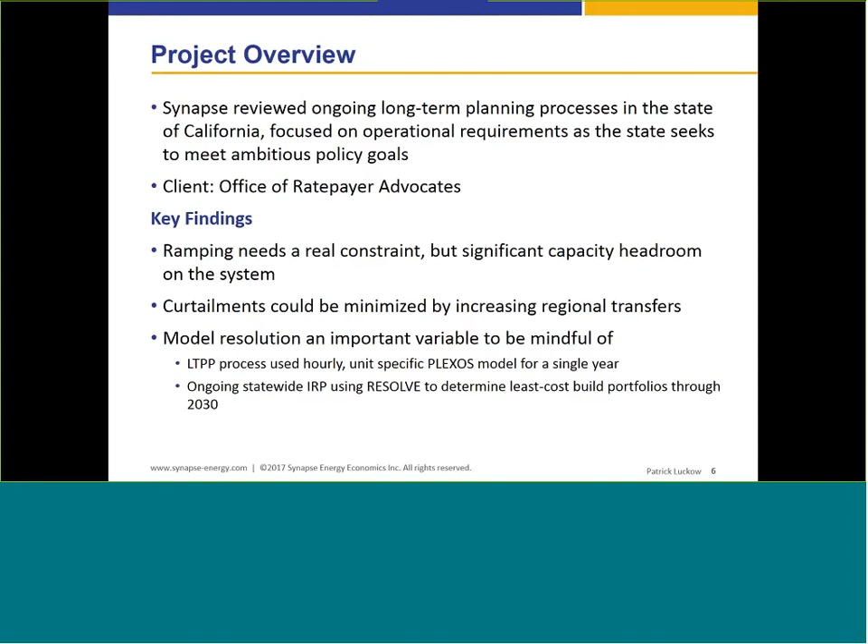Our client for a lot of this work has been the Office of Ratepayer Advocates in California. I've got some key findings on this slide, but I'll cover these as we go. The major factors that we addressed were largely operational requirements as well as ultimate capacity requirements, and I'm going to focus on some of the key characteristics of the different models we've used.

So just to set the scene a little bit, one of the things you'll see mentioned a lot in the context of the California electricity system is the impact that significant new renewable energy builds are having on the grid. And one of those major impacts is seen in the shape of the net load curve.

And that presents some challenges to the system. You have to be able to turn down conventional power plants as solar ramps up in the morning, and then rapidly turn on new resources at the end of the day as the sun goes down. Fortunately, it's a somewhat predictable cycle, so that helps, but there's still challenges with this big ramp up in generation.

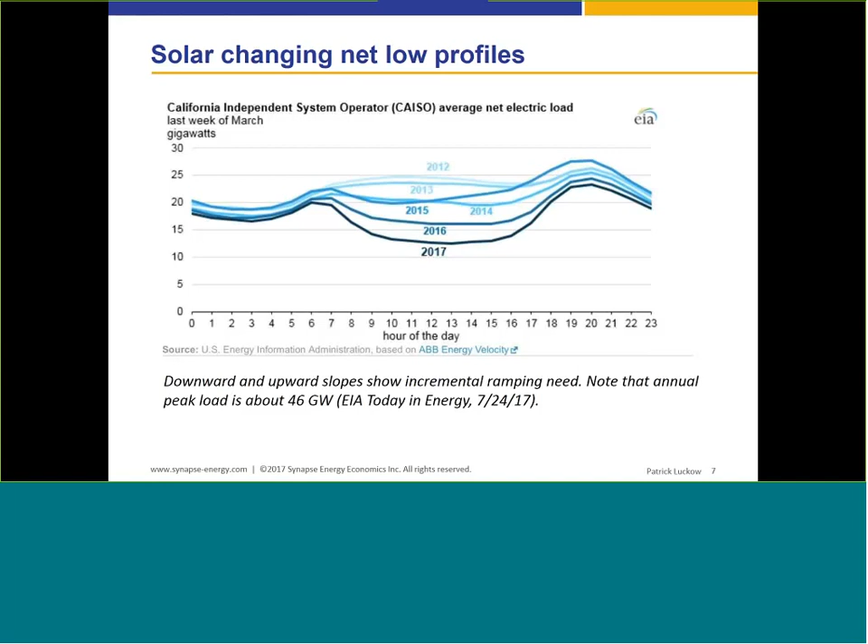And this is a day where California was able to balance these fluctuations and meet the system needs without major reliability considerations. So next I'll move on to some of the modeling challenges we've talked about.

So a lot of the modeling we've done in California has historically been with the Plexos tool developed by Energy Exemplar. This is a very detailed model with all the power plants in California. We model all 8760 hours of the year. The model we used in this context actually had all of the power plants for the entire WECC, all of the states in the West. So it was a very detailed model that had some challenges associated with it. Model runs took a long time. I think a typical run for a single month in 2024 for this project took on the order of 8 hours. So that was a significant constraint.

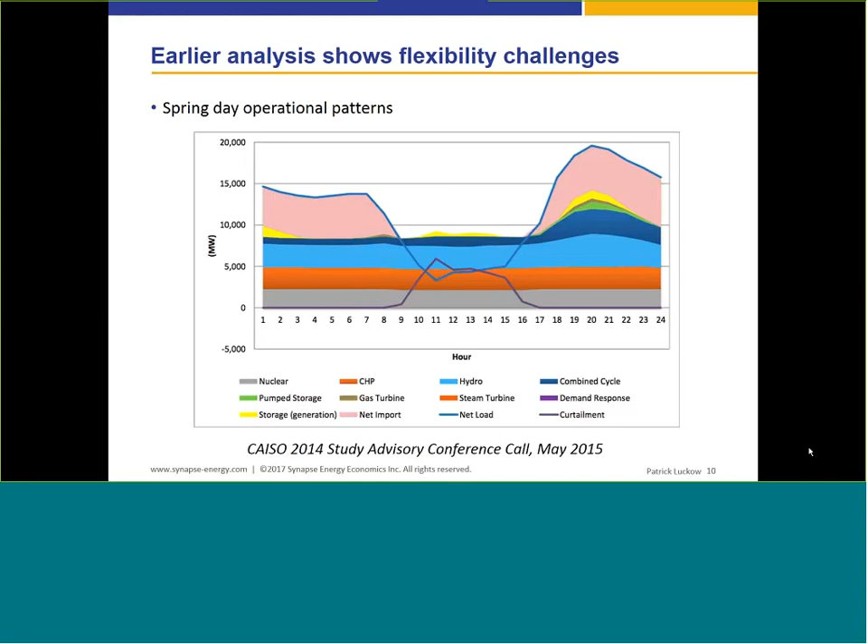There are a number of incremental steps that can be taken to improve this behavior and reduce this level of curtailment that you're seeing on those days. I have a list of those on the next slide that I'll just walk through quickly. And I would say California, in their planning processes, are addressing all of these items, which range from time of use rate making, using different rates for customers at different times of the day to discourage demand at the highest peak hours and encourage demand when electricity is really cheap. Maybe those middle of the day hours where there's a lot of solar energy on the system. Targeted energy efficiency towards those periods where demand is the highest.

Storage is obviously a very valuable resource, whether that's the existing hydro pump storage resource or new batteries, which have come online rapidly over the last year. Electrification is a great source for dealing with this that was considered in a very limited fashion in this earlier study we did. Electric vehicles, particularly with charging at different hours that you could control or influence through the use of something like time of use rates.

Curtailment is something I wanted to mention. A little curtailment of renewable energy resources isn't necessarily the end of the world. There might only be a few days of the year where you have significant constraints along these lines, and being able to curtail some of those resources on those days might provide a lower cost overall solution. And then things like increasing thermal flexibility, whether that's through retirements of nuclear plants or through new gas plants that are much more flexible than the plants that were installed 20 years ago.

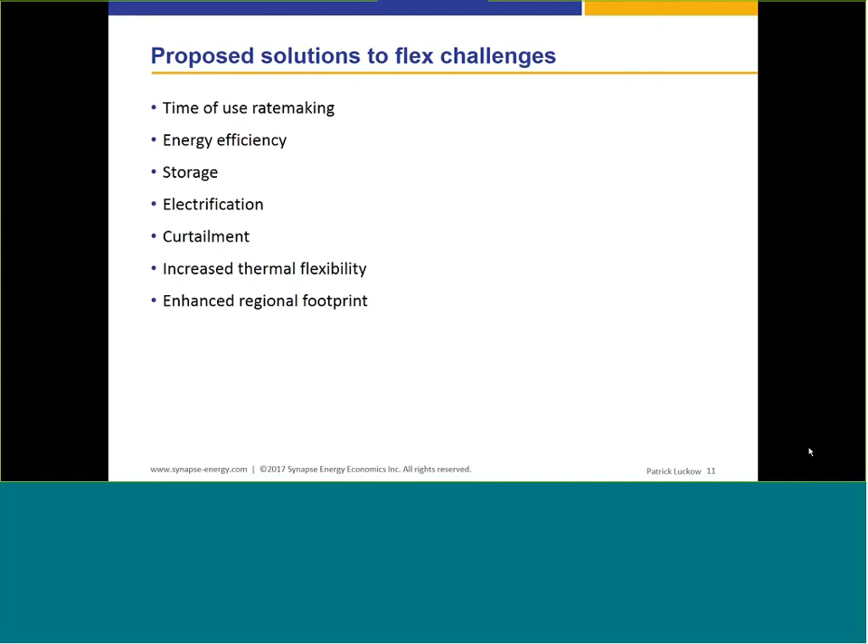So my last slide, I just wanted to touch on the latest California planning process. With the advent of SB 350, which was the bill that increased the RPS in California from 33% to 50% in 2030, there was also a mandate for an integrated resource plan. And that's just in the early steps, but I wanted to pull out some of the results of that. This is a statewide resource planning process where a model is used to consider what new power plants are added and what's retired over the next 15 or so years in order to meet these policies at the lowest cost.

This is a longer-term model than the PLEXOS model I was talking about before. This is a tool that was developed by E3 called RESOLVE, and it focuses on a few key years over the future time period, has less unit-specific resolution, but is able to consider some of these balancing challenges at the same time as considering whether it's more economic to build more solar plants, build more wind, build more gas plants, and in a much finer level of detail than other models in the same category.

And I think thinking about those two modeling frameworks is important. They're both very important and valuable in this discussion and serve different needs. So I think there's a lot of contexts where tools like PLEXOS and tools like RESOLVE can be used either in parallel or in sequence one after another to really get to some of these challenges with ambitious policy scenarios.

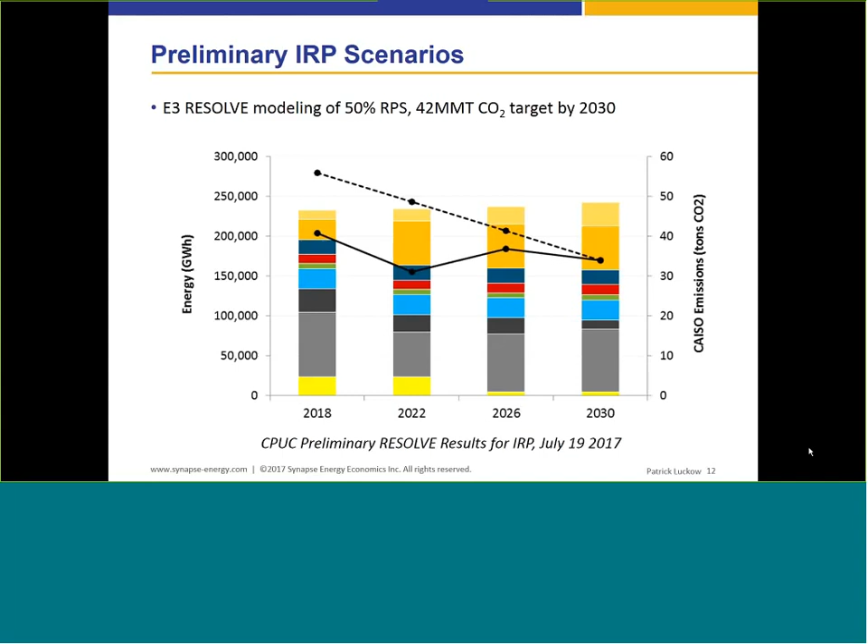Great. So let's move on to the second chunk of today's webinar about Pennsylvania. The Delaware Riverkeeper Network asked us about 100% renewable Pennsylvania. What would that look like? So can you tell us about that, please, Pat Knight? Hi, everybody. This is Pat Knight, and like Bruce said, I'm going to be spending the next couple minutes talking about a project we worked on last year for Delaware Riverkeeper Network.

In this project, Synapse partnered with EQ Research to look at a set of policies that would result in a zero CO2 emissions future for Pennsylvania consumers by 2050. And when we say zero CO2 emissions in this context, we're not talking about just the electric sector, but we're also talking about the other sectors, transportation, buildings, and the industrial sectors as well.

Just to give a broad overview of this project, within the context of the project, we looked at different plans for widespread electrification. We examined increased investment in renewables, and we also looked at strategies that could be used to improve the level of energy efficiency above and beyond what's being done today, or what is likely to be done in a business as usual or reference case future. Another goal of this project was not only to develop a clean energy future for Pennsylvania, but also to create a paradigm or a model that could be applied in other states around the country.

And I'll just briefly go over the findings. You can, of course, read the report if you'd like to know more about this, but we found that the 100% renewables scenario could achieve significant cost savings over the entire study period, could result in $9 billion in bill savings in a single year, and over the entire time period of 2015 through 2050, result in a net increase of nearly 500,000 jobs.

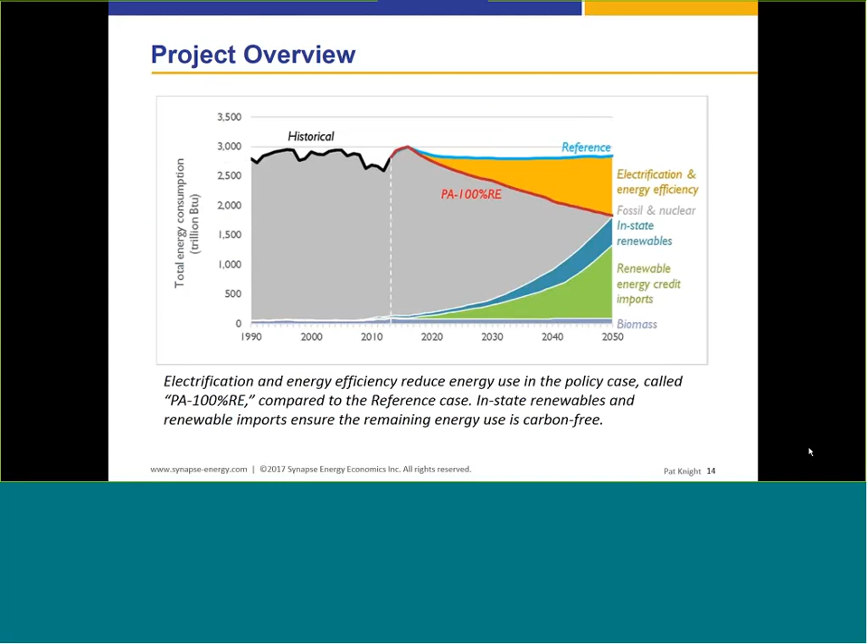So this here is a chart that shows the historical sources of energy in Pennsylvania since 1990 through about 2015, as well as the future sources of energy as they were modeled in this analysis. Again, this chart includes energy from all sectors, so not just the electric sector, but also transportation and buildings and industrial. Compared to that reference case up there on the blue line, in our policy case, the red line, we relied extensively on electrification, energy efficiency, and both in-state and out-of-state renewables to phase out fossil and nuclear energy through 2050. Two quick things to note.

Within the context of this project, we used modeling to build the lowest cost renewables that could be delivered to Pennsylvania. So what this meant is about 1/4 of the renewables were built in Pennsylvania itself, and the other 3/4 were built in neighboring states. So this means that you would have situations where, say, a wind plant or a solar plant was built just over the border in Ohio or West Virginia, for example, and then directly transmitted it into the region.

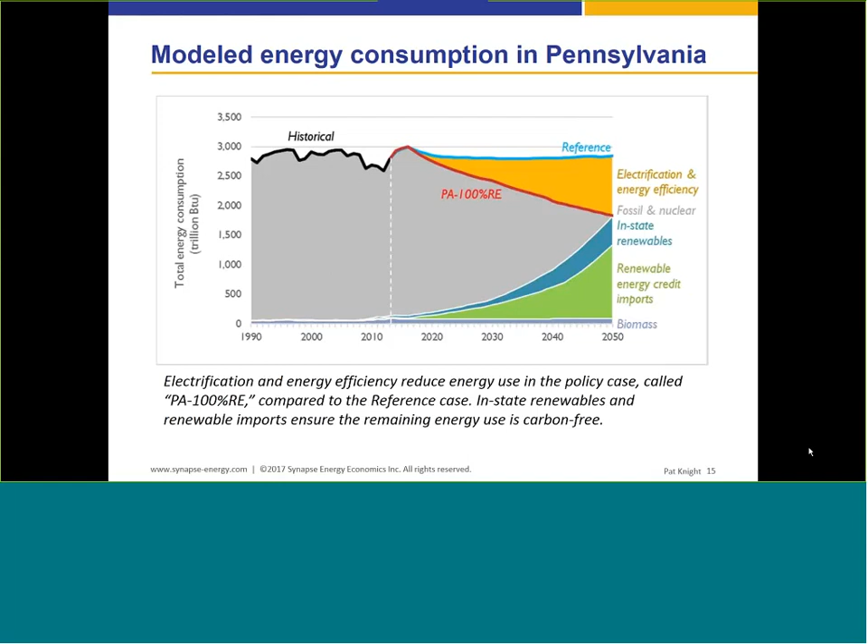The other point I want to draw attention to here is the yellow slice at the top of the chart. And that's not just energy efficiency as we traditionally think about it, but also the energy efficiency inherent in electrification. As I'm sure many people on the phone know, the current uses of energy, both for generating power from natural gas or coal plants, or from generating power in your car from gasoline, waste a tremendous amount of energy on heat. And one of the most interesting findings from this analysis was just how much energy could be saved by transferring those end uses over to the electric sector.

So you're probably wondering how we were able to get to all these conclusions. And what we've done here is make up a table showing the flow of the modeling tools used in this project. Like much of the work that goes on at Synapse, this project required the interaction of a lot of different types of modeling software. So just to talk about each one individually for a moment,

at the beginning of our project, like we do for many projects, we developed a high-level view of the problem or the issue at hand using a simple spreadsheet model. And this model is also used to help us track things like known new unit additions and known retirements, things like sales forecasts, inclusive of energy efficiency, thinking about other variables like natural gas prices and resource costs. And what happens in this step is a lot of this information gets translated into inputs for the next step.

And in this particular project, our next step involves using the ReEDS model. ReEDS, in case you're not familiar with it, is a capacity expansion model developed by the National Renewable Energy Lab, or NREL. And ReEDS contains a fantastic amount of information on renewable energy potentials, costs, and technology changes or curves over time. Synapse has adapted the out-of-the-box version of ReEDS to allow us to have finer control over certain variables like state-specific energy efficiency.

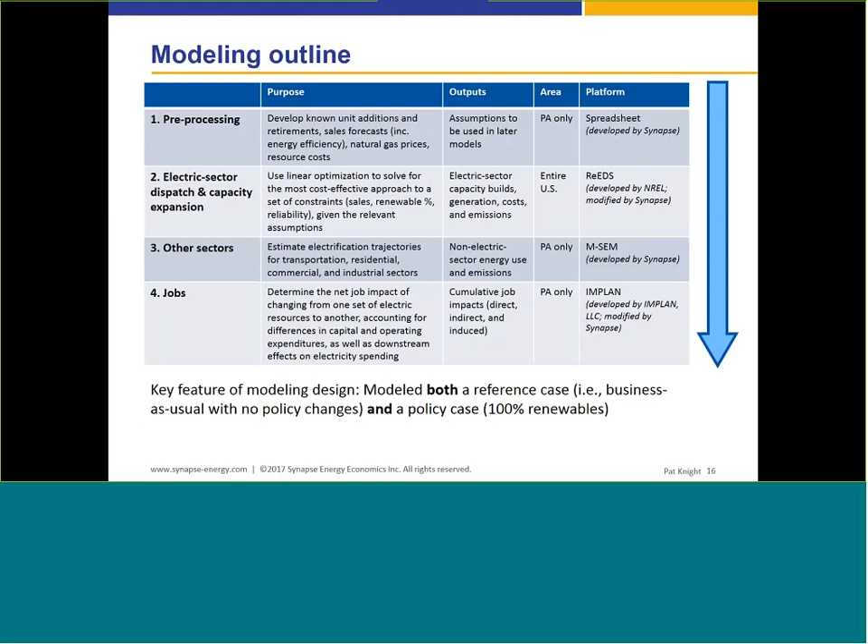Great. Thanks, Pat. So let's move on to the third chunk of today's festivities on Massachusetts and the RPS analysis in Massachusetts. Ariel Horowitz, take it away. Good afternoon.

My name is Ariel Horowitz, and I'm going to talk about our work on modeling the Massachusetts Renewable Portfolio Standard. This is a project that we did in partnership with Sustainable Energy Advantage, which I'm going to be abbreviating as SEA. And the goal of the project was to evaluate the impact of increasing the annual megawatt-hour targets or percentage of sales targets associated with the Massachusetts Class 1 RPS, especially in light of our current procurement policies. This project was conducted on behalf of the Northeast Clean Energy Council in partnership with Mass Energy Consumers Alliance.

So our key findings from this report were really that in a base case, without any change to Massachusetts' current RPS policies, we found, somewhat to our surprise, that the RPS will likely cease being a driver of new renewables in the near future. We found that increasing the RPS from 1% to 2% per year would only have the impact of bringing the supply and demand of renewables into balance. And just to go into that a little bit,

the driver behind that we found was really both about what we expect electricity sales in the future to be, given regional trends, especially Massachusetts' first in the nation accomplishments in energy efficiency, and also our use of procurement-based policies, or policies that increase the supply of renewable energy directly, as opposed to simply increasing the demand for renewable energy. So the impact of both of those trends meant that we found that the state needs to at least increase the RPS to a 2% per year target to bring that supply of renewables and the demand for renewables into balance and make the RPS really a driver of renewables in the region.

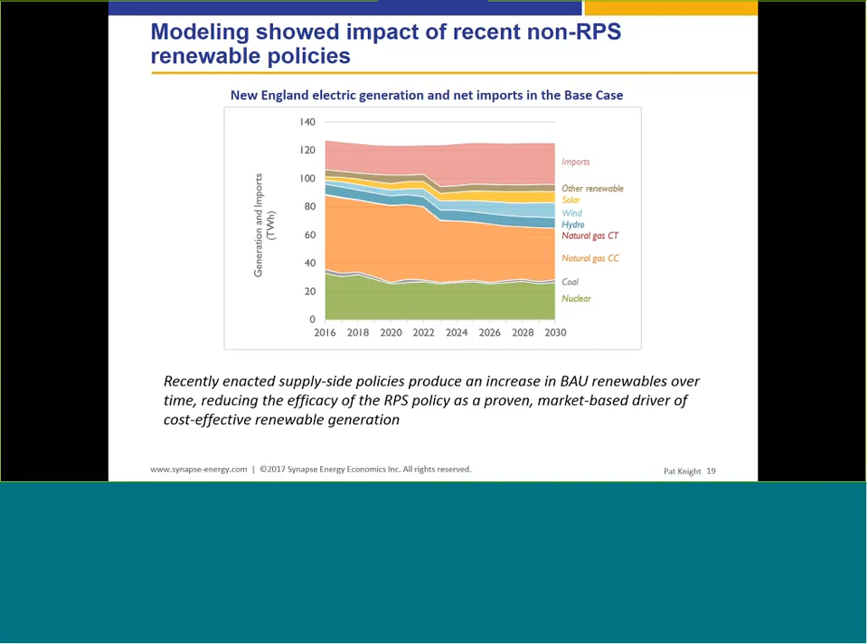And what we found was that these recently enacted supply-side policies, these procurement targets, produce a sufficiently large increase in renewables in the business-as-usual case that the RPS policy no longer acts as a market-based driver of new renewable generation. So you can see there that even in the base case where we don't increase the renewable targets, our regional reliance on fossil fuels goes down, especially when we model some of the hydro and new Class 1 renewables targets coming online in the early 2020s.

So as Pat did, I'll go through a little bit of the modeling structure that we used for this project. Similar to our Pennsylvania study, we passed data back and forth between a variety of different models here. The first step was to do some spreadsheet-based pre-processing, and that was to develop known unit additions and retirements, to figure out what we thought demand for electricity would be over the coming years, to forecast natural gas prices, resource costs, and other region-specific inputs, such as what we think is going to happen in response to the recent establishment of energy storage procurement targets.

And this is a data set that was based on one originally developed by Anchor Power Solutions, the company that makes the Encompass model, and that we've since made a variety of in-house modifications and additions to. We performed this project internally. We think of it almost as a follow-up to a project that we did several months before, looking at the need for new gas pipeline capacity in the region, which was also modeling the New England electric sector. And one of the benefits of using these tools is that we've become very intimately familiar with this data set and have been able to sort of iteratively modify it over time.

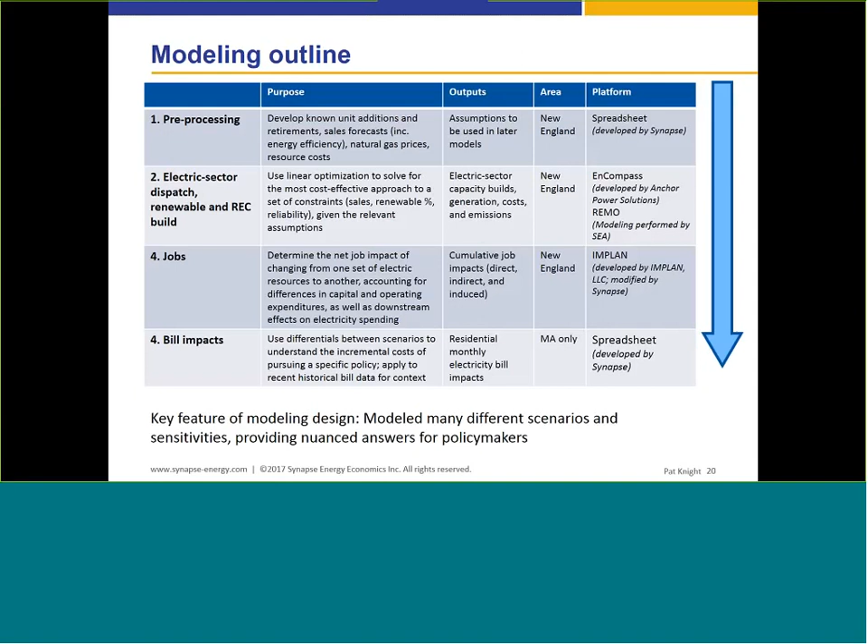Thanks, Ariel. I have a couple of questions for Patrick, going back to the California analysis. One is about curtailment. You mentioned curtailments being limited, Patrick, and the question is, are there studies that support that, and if there is going to be curtailment, then contracts have to deal with that, right? So could there be price impacts and maybe litigation? Yeah, that's a great question.

Curtailment is definitely a big issue that has been studied in a lot of modeling processes. California is not only a national leader in ambitious clean energy policies, but they're also leading in terms of reasonable and thoughtful analysis about the impacts of challenges like this. And I think curtailment was an output that was considered on both of the studies I talked about, as well as a number of other studies.

There's a non-trivial amount of curtailment happening today, particularly in the spring months. And I think that the inputs to these studies are evolving as we go and get a better understanding of the best ways to manage these challenges. The latest studies allow more net exports from California, which is a big factor in reducing the amount of curtailment in those days with the highest amount of solar and the lowest amount of loads